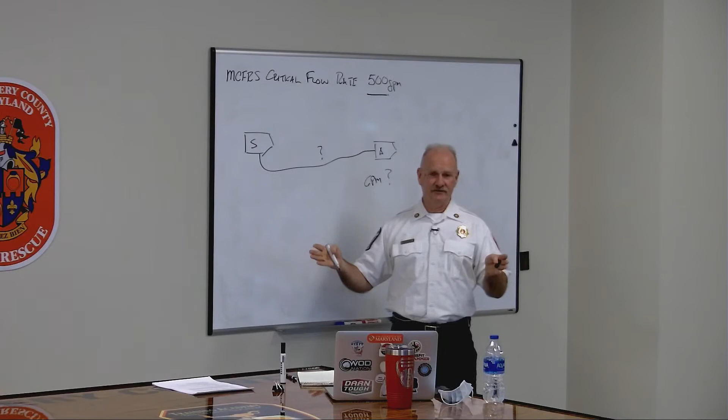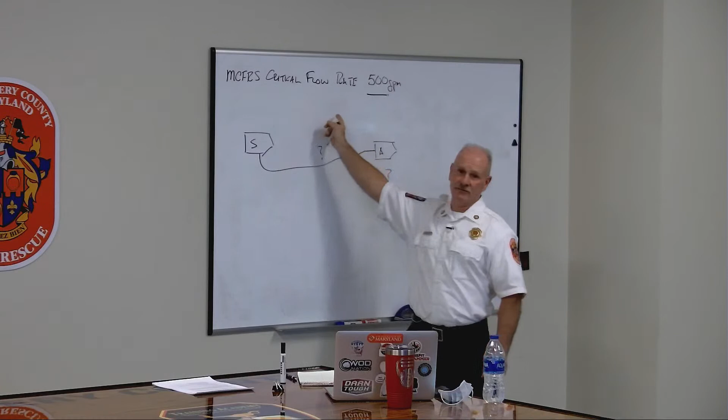I think it's also important for our engine drivers who may be forced into a relay scenario. What does that mean? And for our command officers out there, like, hey, you got a 3,000 foot lay back to this house that's on fire, behind a single lane or common use driveway. What are some choices? You're going to find out that you might be able to accomplish and meet our critical fire flow need with a little bit different approach than what we would have thought about before.

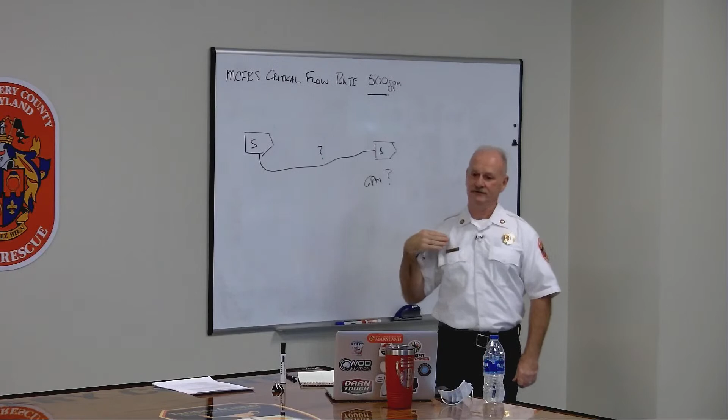That's all I got to say. I may interject some other stuff as we go along. What I really want is Captain Lipp to talk about the what, why, and the outcome of the project that he worked on. Captain Lipp.

Thanks, Chief. So to start out, I want to acknowledge the folks involved here. Captain Dominic Coletti had a big role in conceptualizing this, coming up with our goals and talking through some of the scenarios and our intent. Chief Davis lent us his expertise as well as some of his specialized equipment, which was invaluable. And we had folks from stations 10, 14, and 31 on the C shift that were all involved on a rather brisk November day laying out a bunch of hose and flowing some water and entertaining my whims as far as accomplishing all this.

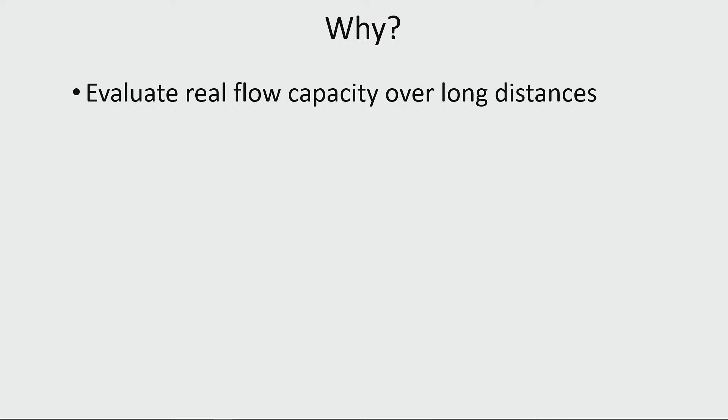So why did we undertake this? Well, we have these long-held beliefs about our ability to pump water over long distances, but we've never really validated it. And there are some long-held beliefs by the organization about how often we have to interject a relay pumper if we're pumping over a certain distance. As I anecdotally talk to folks around the organization, they say every 1,000 feet we need a fire truck. And to me, it seemed like that was excessive, and it often would interfere in our ability to effectively and quickly build a water supply for a fireground operation, because we got hung up in this expectation that we needed X number of fire trucks if we're going to pump that long.

So I wanted to make sure that what we were doing made sense. Notionally, it wasn't making sense to me based on calculations I had done. I wanted to look at the formulas that we use for our calculations and validate them.

MCFRS, if you look at our 4-inch LDH, we calculate our friction loss at, for every 100-foot section, Q squared divided by 5 is the formula that we've always used. Well, is that a valid formula, and does it actually bear out in real-world practice?

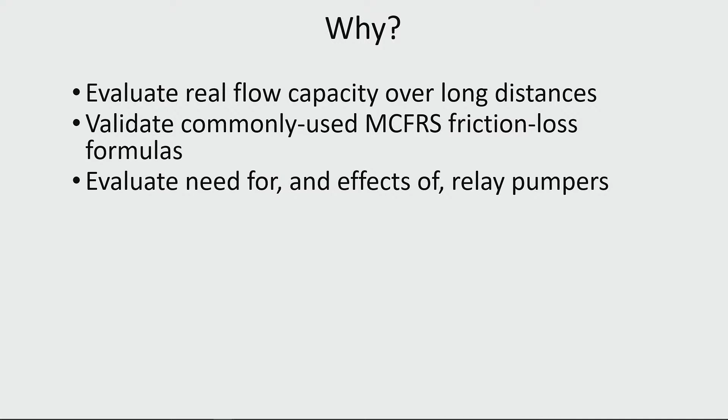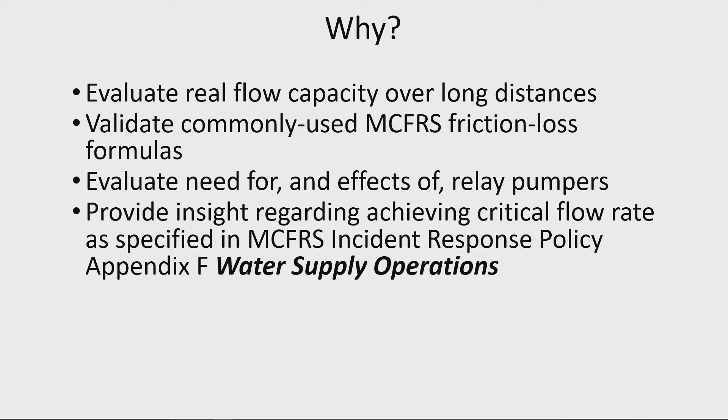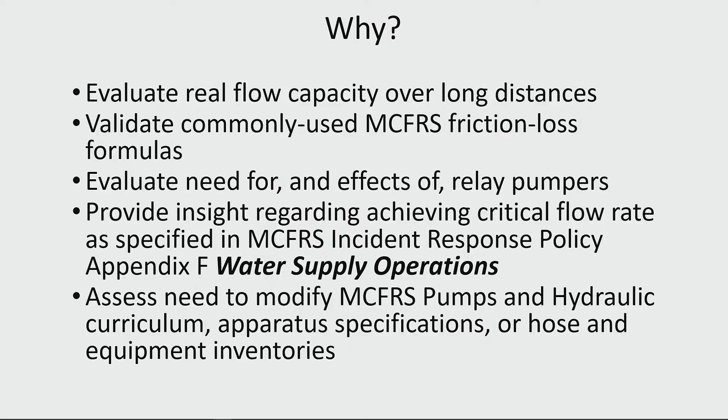We wanted to look at realistically how often we need to insert a relay pumper, and what were the effects when we did. We wanted to take all this information and relate it back to what we're doing in our incident response policy in the water supply section, as well as the curriculum we're teaching in pumps and hydraulics, our apparatus specifications, and our hose and equipment inventories, and just make sure that the stuff we were doing makes sense and passes muster in the real world.

So that's sort of where we started.

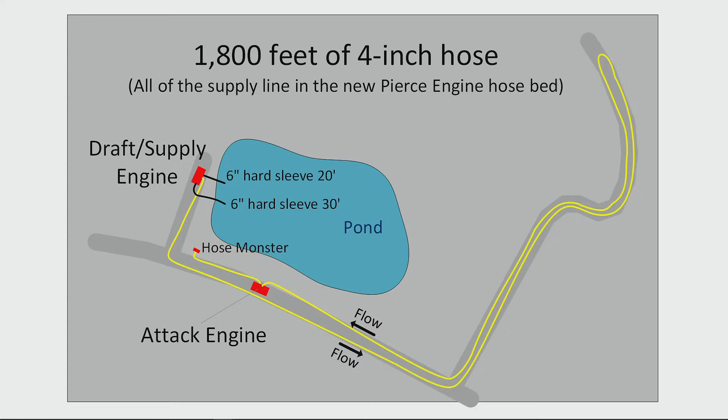Operationally, what had been decided by the apparatus and fleet folks in the organization and the ops representatives was that we should not be comfortable pumping a 4-inch supply line at anything higher than 250 psi. We arrived at that number because we service test the 4-inch hose at 300 psi, and the chiefs felt that we needed to leave a bit of a margin of error so that we're not pushing the hose right to its limit. So 250 psi was set as our maximum supply pressure from that draft engine pumping into this supply line.

It's important for me to mention here that the 250 psi is what's determining how much water comes out the other end of the hose. So it doesn't matter whether we're putting the 250 psi in from a pond or from a hydrant or from a tanker pumping a clappered Siamese. What we're looking at is that if we know the maximum in is 250 psi, what does that translate to as far as GPM out the other end of the hose over what we consider to be long distances.

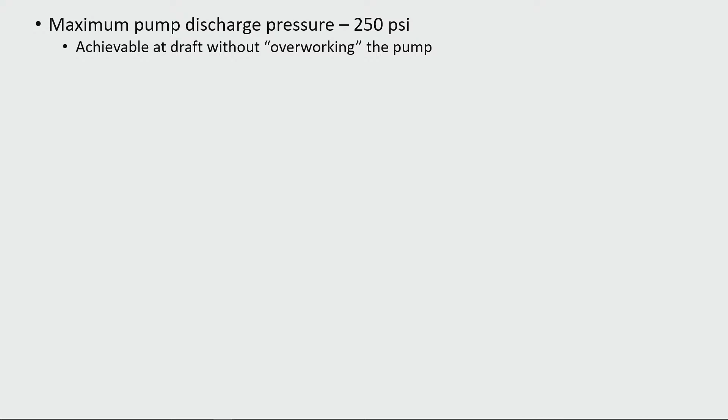So this first scenario, we had a maximum 250 psi pump pressure because it's achievable at draft without overworking the pump. It's also achievable with a tanker pumping off, and it's certainly achievable operating from a hydrant. It leaves a margin of safety. Currently the high flow discharges on some engines have a hard-set relief valve on those LDH or high flow discharges that's set at 200 psi, and we're investigating modifying that so they'll all be hard-set at 250 psi so it's standardized across the organization. The Pierce engines' discharge pressure relief on large diameter discharges are maintained by the pressure governor on the apparatus.

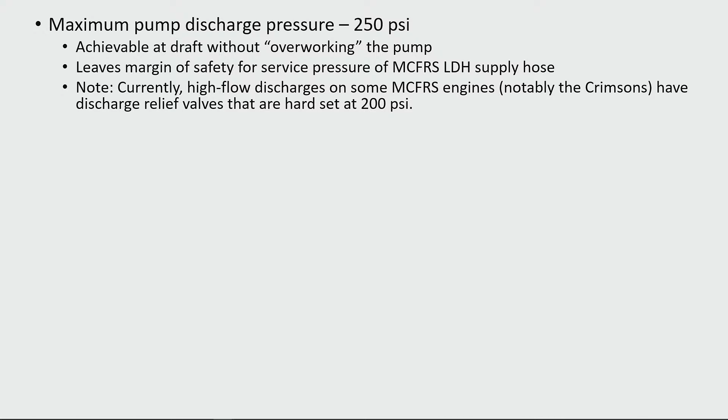One really important point we want everyone aware of is that MCFRS engines all use our same specification 4-inch large diameter supply hose that has a working service pressure of 300 psi.

But if you have mutual aid companies involved in the supply line or on the fire ground that may have hose on the street, we need to be cautious because they could be carrying the old rubber jacketed hose that had a maximum service pressure of 200 psi, so we'd have to adjust downward. We wouldn't get the flows we were trying to achieve, but we also wouldn't hurt anybody by rupturing a supply line hose.

In the end, what we went for was a scenario that gave us zero net head pressure, so elevation wasn't a factor. We pumped up the hill and it came back down to the same elevation as the draft engine, so the net was zero. But if you were pumping uphill, you're going to have a little less flow available because you're pumping against some head pressure, and that's eating up a bit of that 250 psi, depending on how big the hill. So just be aware of that.

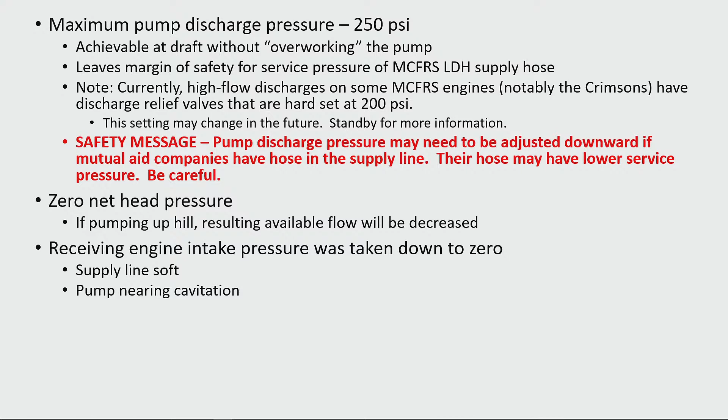On the receiving attack engine, we took his intake pressure down to zero because we wanted to get the maximum water out of the supply line. That was established by the supply line going soft at the intake and also the pump nearing cavitation. You could look at the pump discharge pressure gauge and see it bouncing because of the cavitation effect. We knew we were right at the limit, and we wanted to make use of every gallon available in the supply line.

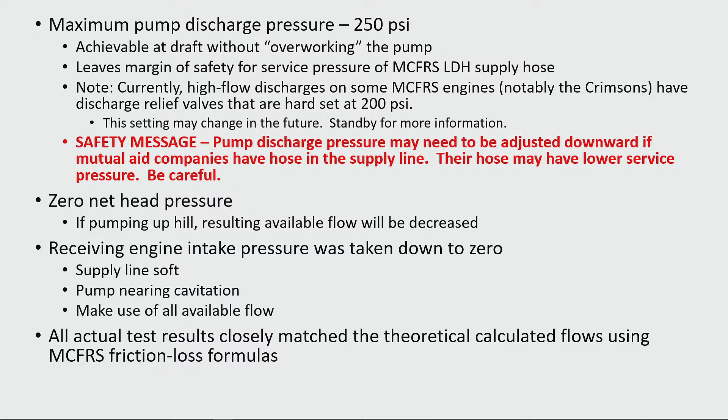One of the really important things that came out of this was that we validated that our theoretical calculated flows, based off our standard MCFRS friction loss formula, actually work. If you remember from your pumps and hydraulics, every engine driver knows that for every 100-foot section of 4-inch hose, we calculate friction loss as Q squared divided by 5.

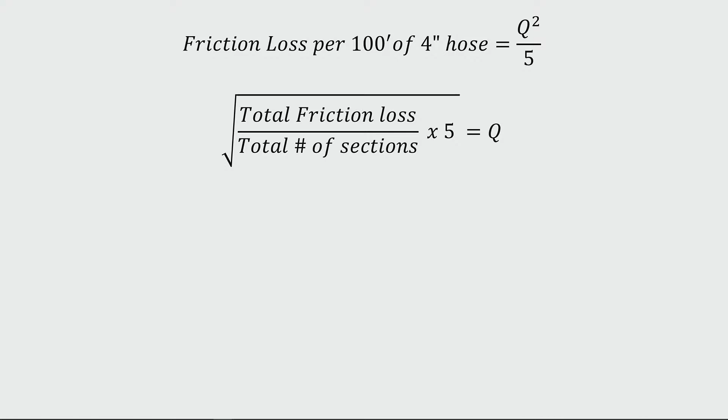What I was interested in here wasn't the friction loss, I was actually interested in the flow. So I had to solve this formula, a little algebra, and flip it around to solve for Q. That means the total friction loss divided by the number of sections times 5, and the square root of that gives you the flow. Not everybody cares about that, but if you do, that's how we arrive at it.

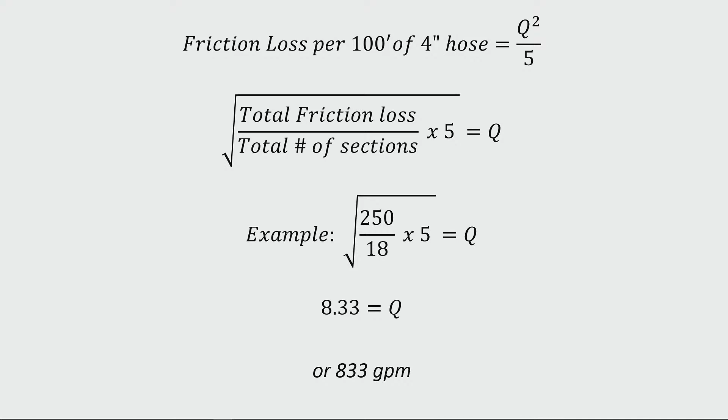For example, if we know we're not going to pump the line at more than 250 psi, and in this scenario we have 18 100-foot sections, we can calculate Q, and it comes out to 8.33. So theoretically, based on the formula, we're expecting 1,800 feet of supply line to deliver 833 gallons per minute to the fire ground. So the question is, did that play out in our actual real-world application?

We laid out 1,800 feet of hose. We didn't have a relay pumper in the middle. We put 250 psi in one end, and out the other end came 843 gallons per minute. That's a fantastic flow for just about any fire ground in Montgomery County. We know in our IRP our critical flow rate we're trying to achieve is 500 gallons per minute, so 843 gallons per minute more than meets that.

That leaves us a lot of extra fluff, and certainly can cover the vast majority of the fire grounds that we're up against. So that was...

I think I'd like to interject something. So, and you mentioned it, but I think it's important to highlight, what was the attack engine's intake pressure? The attack engine's intake pressure was essentially 0.

Right, so that's really important. For you engine drivers out there, the experienced ones understand, hey, I'm willing to drop my pressure to 0 if I need to, I'm just gonna have to be really careful about that. For the new folks going by what the book says, in order to get that flow, you had to be willing to take your intake to 0. And that means you got to monitor that - not 20 on the intake, not 50 relay pressure on the intake, none of that.

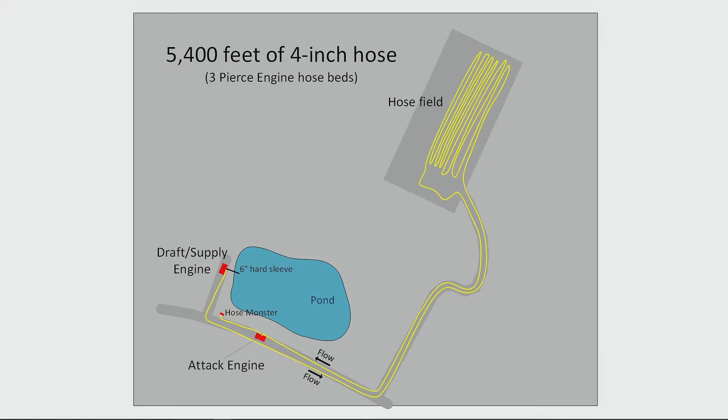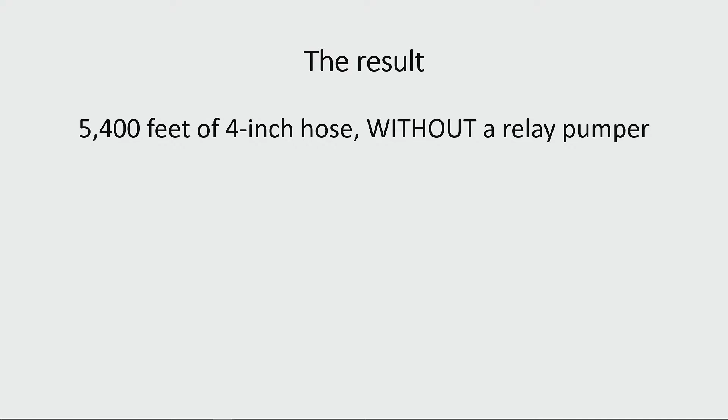Same exact thing, I did the calculation. The calculation told me that I should expect 477 gallons per minute, and we got 471 gallons per minute. That's pretty close to 500 gallons per minute, and that's through 1 mile of hose, a little bit more than 1 mile of hose. We were able to get 471 gallons per minute out the other end from just one engine pumping 250 psi in the front of the hose. That's pretty significant.

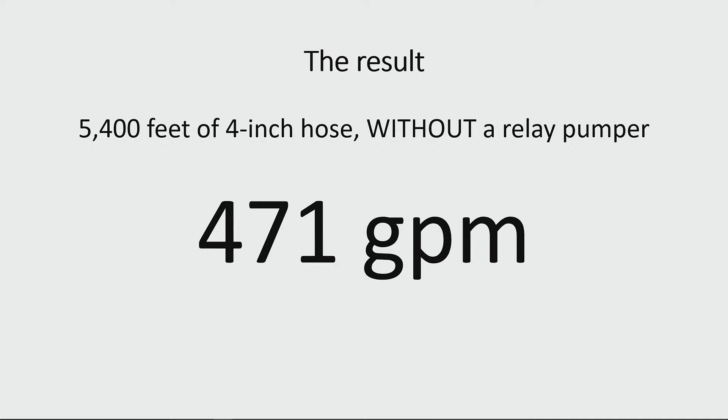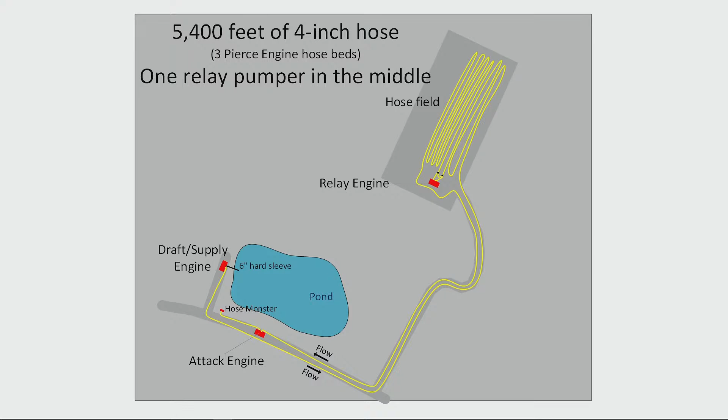We did it again, and this time we just put one relay engine in the middle and then saw what the effect was on the GPM out the other end. So there are a couple of different ways that we're going to talk about how we're going to put the relay pumper in the middle of the supply line.

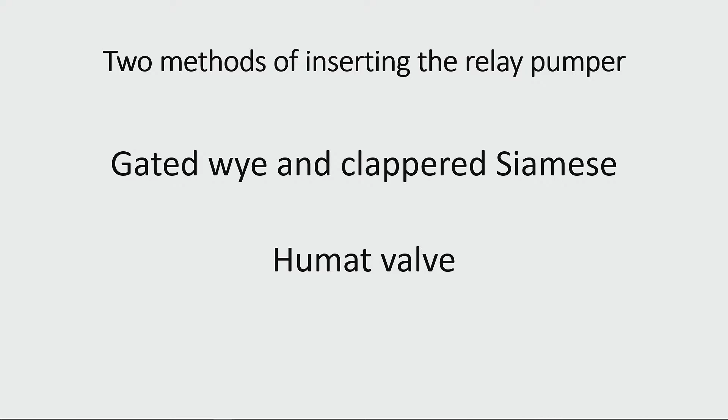I'm calling this our heavy water relay hookup, and that is utilizing a gated wye and a clappered Siamese to take the water from the supply line coming in, send it through the relay pumper, and then boost the pressure to the fire ground, because this gave us our greatest flow. However, if for some reason you didn't have that, or it wasn't set up, or however you're trying to recover and you need to, you can use a HUMAT valve. We're going to talk about both of those. So this is the heavy water relay hookup.

So the water supply coming in from whatever the source, whether it's a pond, a hydrant, or a tanker, is coming in from the right-hand side of the slide. We drop that jumbo gated, the 4-inch gated wye, down on the ground. That little short shot of blue hose that goes across to the clappered Siamese is one that we had made up years ago when I was doing some other tanker testing. It actually wouldn't be a bad thing for all the engines to have, because it is a nice little functional hose for a couple different things on fire grounds. But that's the hose that is the direct through from the supply to the attack engine at whatever pressure was coming into the hose. So you had the mile of hose on the ground, 250 psi. It's passed straight through to the clappered Siamese going into the attack engine off the left side of the screen there.

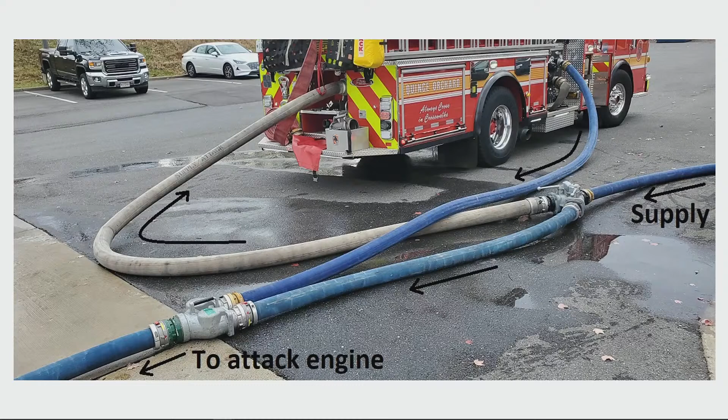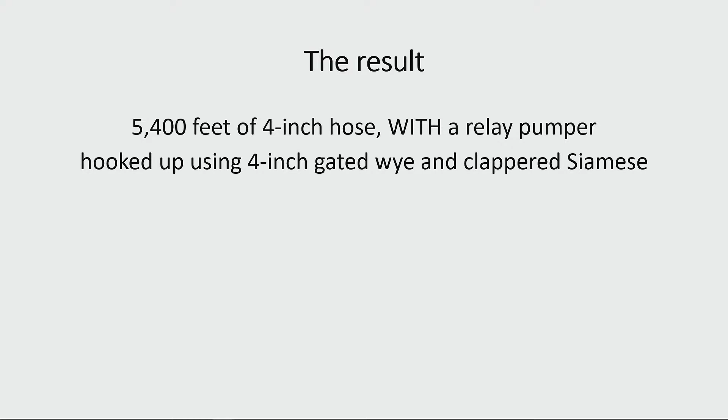But then we want to insert our relay engine, so we use our large intake sleeve, and we hook into the other side of that gated wye, and then just like you would if you were pumping a HUMAT valve, you boost the pressure in the other side of that clappered Siamese. That's going to take over, and you're going to boost the pressure. We did this at the 2,700 foot mark. So one relay engine in the middle, right at 2,700 feet, using that heavy water relay hookup.

And we boosted from our 471 gallons, we went up to 672 gallons. So we gained 200 gallons per minute just by putting one engine in the middle of a mile of hose. That was pretty significant. The other thing that's a little bit significant here is that if you ran that calculation using the Q squared formula and solve for your gallons, you would come up with 680 gallons per minute. So once again, validated our friction loss formula.

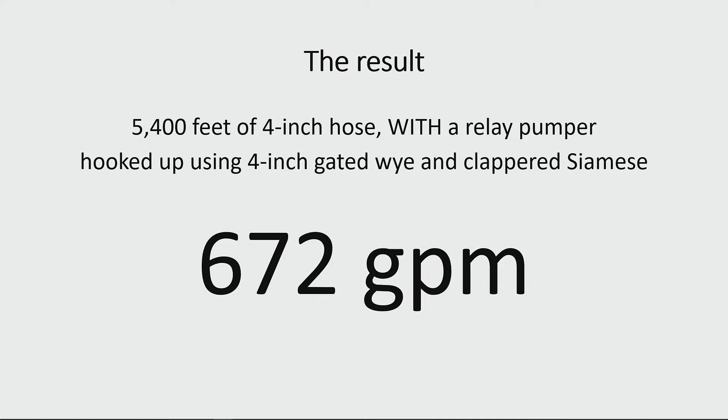And then you just boost the pressure off of the HUMAT valve just like you would as if it was hooked directly to the hydrant. So you put your sleeve on the other end, open up the butterfly valve, hook the pressure to your high flow discharge, and send it in the other side of the distribution box, and you've then boosted the pressure.

The caveat to this is that there is a pressure loss here because there is friction in that HUMAT valve. And we know that because we would normally, if we were hooking that HUMAT valve to a hydrant, we always want to dress out that hydrant first with some gate valves on the 2.5-inch butts so that we get every drop of water we can out of the hydrant. So the same thing here, we know that we're losing a little bit of flow capacity through that HUMAT valve because there is some inherent friction and flow restrictions in it. Unfortunately, because it's a HUMAT in the middle of nowhere, we can't dress out the hydrant here. So we're stuck with that.

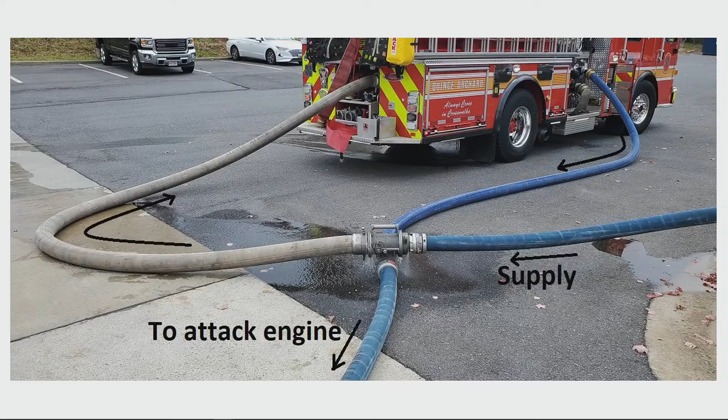Here's the impact of it. At 5,400 feet using the HUMAT valve as our relay hookup, we lost 100 gallons per minute.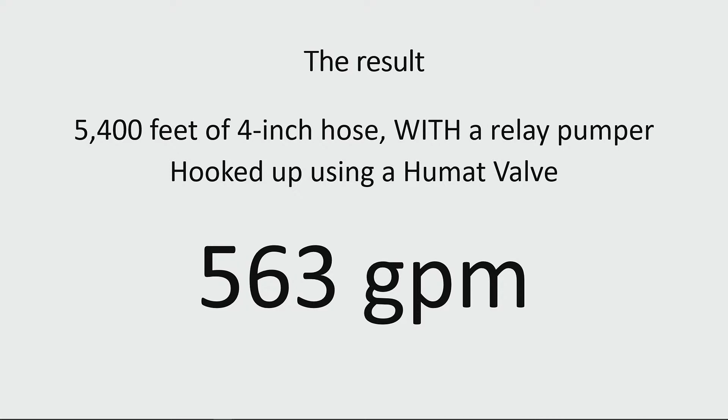So it's not to say you can't use the HUMAT valve. You just have to realize you're sacrificing, in this test, about 15% of your available flow by choosing to use the HUMAT as opposed to using that jumbo gated Y and the clappered Siamese.

So Chief Davis has a couple of slides he wants to go through, and then I think we're going to try to go out to the engine room and do it practical for you. All right, cool. All right, thanks.

So there are our test documents. Captain Lip did a really good job writing everything up. I know you can't see them here, but they'll be on quick links. We promised to have them up by close of business this Friday. There'll be one for each test. It lays out everything: scientific method, how we went through it, all the math. Hopefully you don't skip math class, right? In middle school anyway. Did a good job on that. There'll be quick links under our current priority projects on the front page. They'll be up there for a while, maybe 60 days or so. They'll be PDF. Take a look at it. Good to go.

Wanted to talk about two things before we go outside to the engine room. One, we did some tanker testing for ISO back in August. A logical question that comes up is: can my tanker pump 250 PSI through the high flow discharge? So we had to confirm that. We confirmed it through fleet and through the pump testing folks, and yes, all of our tankers and 17's engine tanker, every one of them, can develop 250 PSI through the large diameter hose discharge. So there should be no worry about hooking your tanker up to the double clapper Siamese at the end of 5,400 feet of hose, or 1,800 feet, or whatever, and not being able to develop that flow. You should be able to do that.

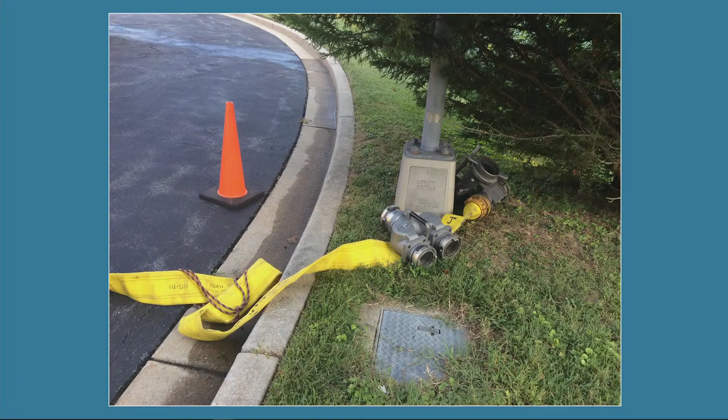Second, during the ISO testing, somebody asked me, do you want the double clappered Siamese on it? Just asking that question told me that there's a little bit of uncertainty about what's going on out there. Our tanker operations need to meet that 500 gallon per minute critical fire flow in non-hydrant areas, so somebody needs to drop that double clapper. I don't care who does it, preferably it's the engine company that's laying it out. Those running the Pierce engines, you've got to be extra good about making sure that thing gets dropped.

I think that's all I got. One other note, the test we did was from draft. That is the hardest the pumper's got to work. Why do we pump test it from draft? That's the most difficult condition. The pumper works hard to get water into it, and it also works hard to get it out.

You'll also note we did it with 2 sleeves. So the old notion of, if I'm an engine going into a water site, try to get as much water into me. On the hydrant, heavy water hookup at a pond, you're looking to get twin drafting sleeves in there as best you can with good high flow strainers, and that's what we did with that Pierce. So 31's wagon worked really hard that day, and it's clear what their capability was.

Any questions before we move outside? No questions. Gotcha.